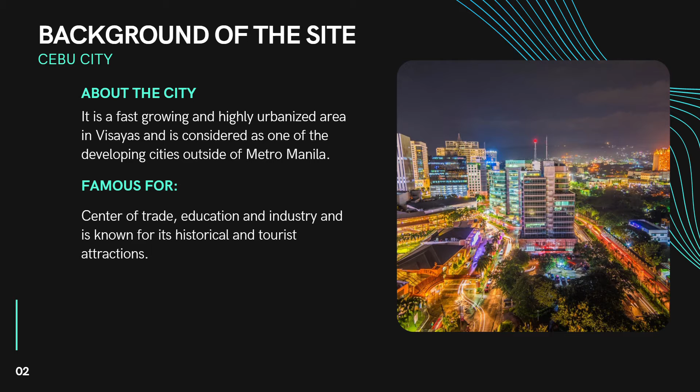A little background of the site, and why we chose Cebu City. It's actually a fast-growing and highly urbanized area in Visayas and is considered one of the developing cities outside of Metro Manila. The city is famous for its center of trade, education, and industry, and is known for its historical and tourist attractions.

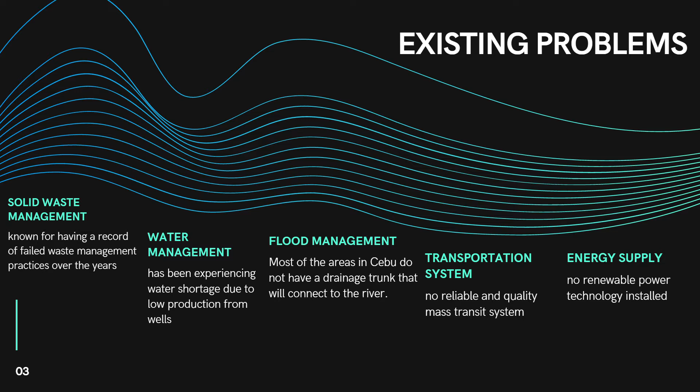With the developing city comes existing problems. We have researched that Cebu City's existing problems are solid waste management, water management, flood management, transportation system, and energy supply. With these five existing problems, we chose to tackle three: water management, energy supply, and flood management.

For water management, Cebu City has been experiencing water shortage due to low production from their wells, river and dam. These are some of the causes, including weak implementation of environmental policies and regulations as well as low public awareness and concern. For their energy supply, Cebu City imports almost all of its energy, other than the 11% of electricity consumed that is generated within city boundaries.

All energy sources like electricity, oil products, and natural gases are imported. Although Cebu City has significant potential to harness solar power, it does not do so because no renewable power technology is yet installed in the city.

For flood management, Cebu City is not really prone to earthquake, it's not on the fault line. However, the city has been experiencing hazards such as flooding in the uptown areas, mainly due to problems of waste and drainage. Floods within Cebu City are generally concentrated along the downtown areas.

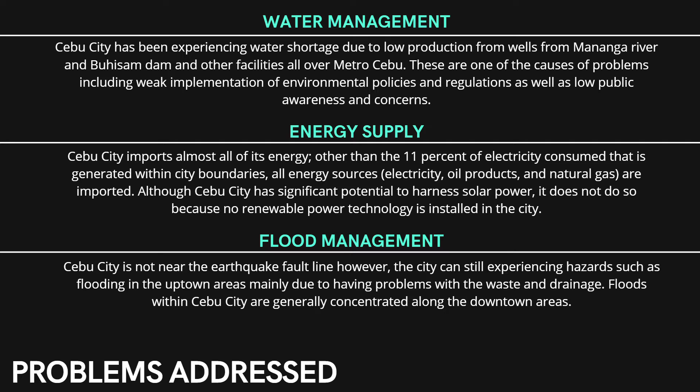A city of tomorrow, a self-sustaining city. The NDRRC pod is a long-term solution to the problem of water rising and energy supply in Cebu City. Power will be provided through a series of renewable energy sources, including solar, thermal, wind energy, hydraulic, and tidal power station.

The concept of the floating pod is that it harnesses tidal and wind power and has water desalination. It connects to the city, so it's able to provide electricity and water.

Through computation and research, the floating pod is able to make 800,000 liters per day, that's 211,337 gallons of water, and is able to provide for 20,000 people. For electricity, it's able to make 40,000 kilowatts and is able to provide for 40,000 households.

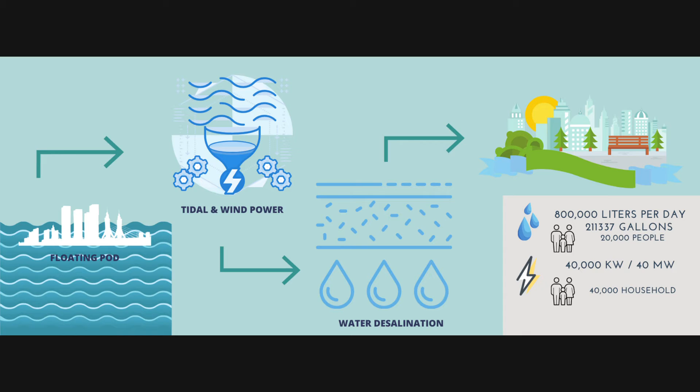For platform elements, this is from another case study we were able to research on. The platform size is 80 by 100, and platforms will be bolstered by biorock, a material created by exposing underwater minerals to an electric current.

The platform has three layers. The outer layer will be made out of polyester fiber covered by titanium dioxide, which can react with ultraviolet rays and can absorb atmospheric pollution through photocatalytic effect, in the same way as air purifying concrete and paving stones.

So there are three layers for it: the platform roof, the reinforcement walls in the middle, and then a floor and perimeter walls.

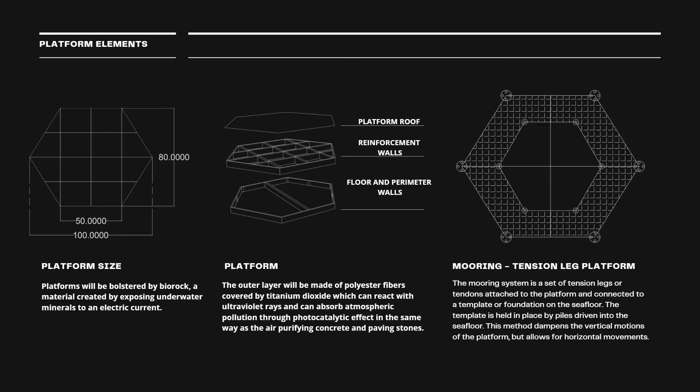For platform shape, we chose a hexagon because we have researched that an aerodynamic platform shape reduces impact of strong winds and flying debris. The symmetrical shape also gives balance to the structure.

For exterior circulation, structures would have double facade and would act as a buffer from wind and rain, and protect the interior where people will reside in case of flooding.

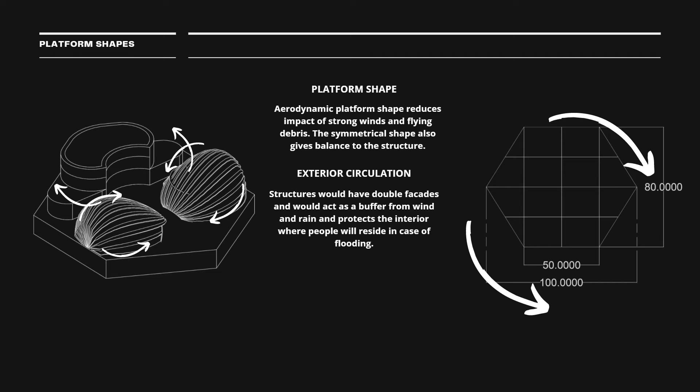This is the Cebu City plan. As you can see, the floating pods are relocated on water, and then there would be a huge land before the start of Cebu City on the far left. On the land, that's where we'll be putting up the connections, and then the connections will be connected to the city itself.

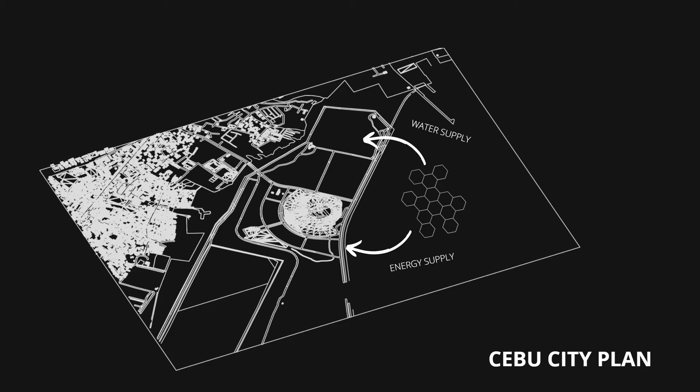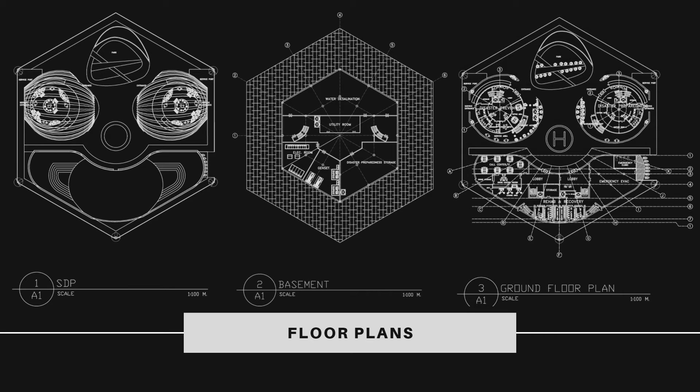For more detailed explanation, here we go. The basement is where we put the water desalination, utility room, disaster preparedness storage, and then the utilities like electrical room and genset.

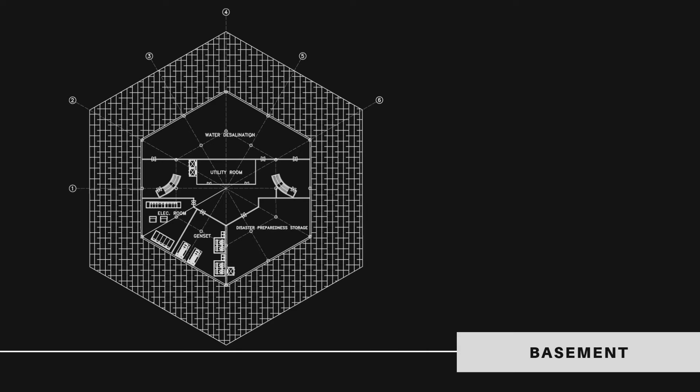So the disaster preparedness storage actually has its own elevator, and it connects to the evacuation centers, though it doesn't show here. This allows easy access from storage to the evacuation center in case there are people residing there and in need.

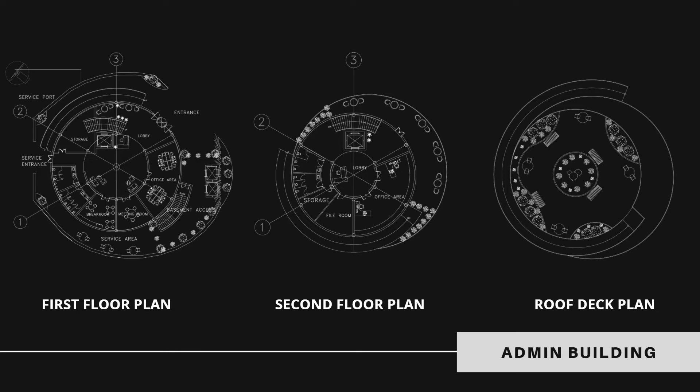On the second building, these are the rentable spaces and training center. As you can see, from the entrance you go inside, there's a lobby, two lecture rooms, and a big storage. There's also a service entrance, and they have a basement fire exit, so they have access to the basement.

On the second floor plan of it, there's a big training room and also a big storage. On the roof deck, there is also a garden.

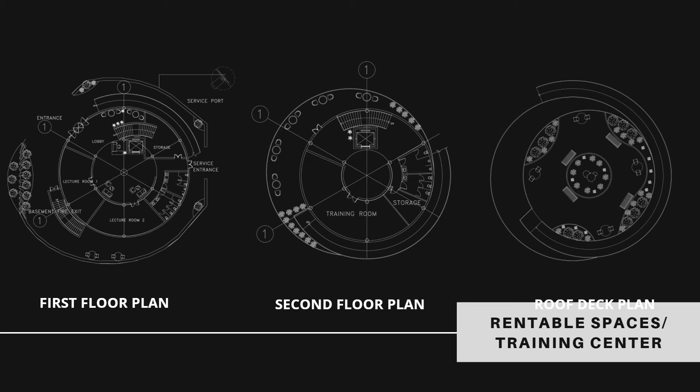For the control and evacuation center, the first floor plan on the right is the rehab and recovery. As you enter the lobby, this is where people will be signed in in case of evacuation and disaster. The lobby is big enough so people are able to register before they are put into the evacuation.

On the first floor plan, the emergency evacuation has its own speedboats on the right, and in case there are people who are really in need, they're put there. We have put an emergency clinic there, so once they arrive at the pod via speedboat, they're automatically put into the emergency clinic and be treated.

On the left side of the lobby, this is where the call center IT is, where people would call in case they're in need. We put a big office space for that, for different parts. We also have a drone storage and drone control center just to see how the situation of the people is going, and we put a lounge area there too. We also put a big CR on the bottom part for men's and women's, and a shower room in the middle in case of emergency.

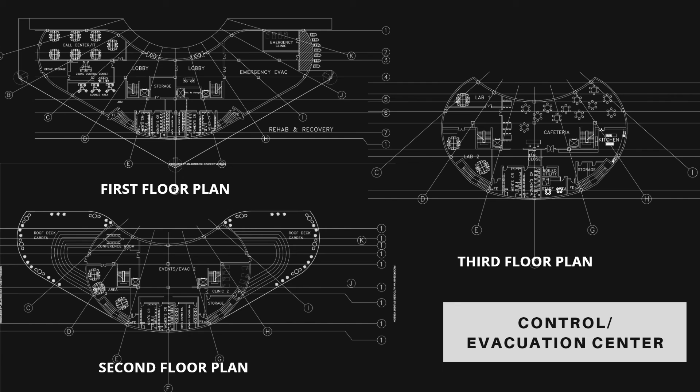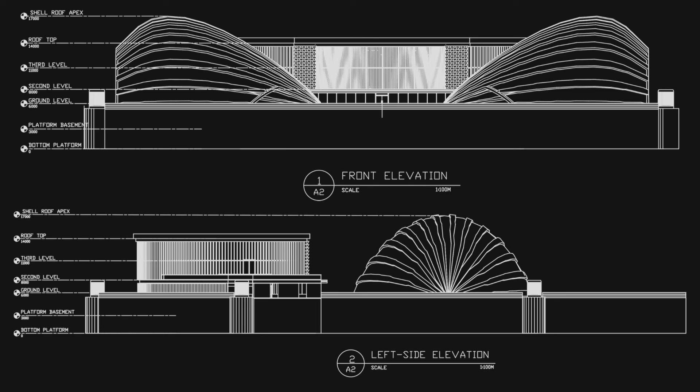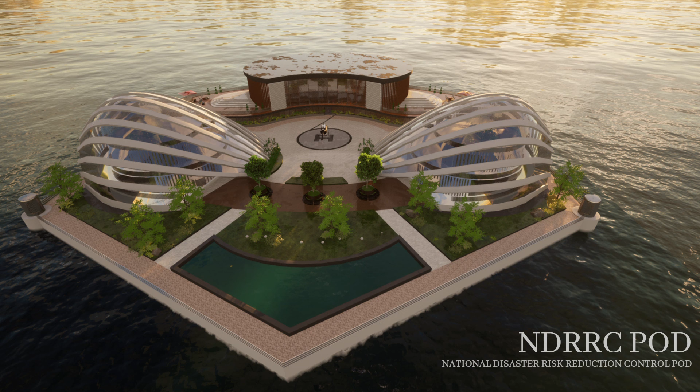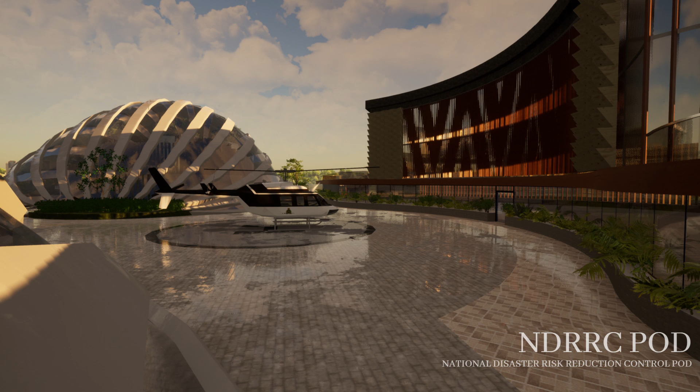This is the rendered perspective of the NDRRC pod. As you can see, it's on water, and we've put a helipad in the middle for emergencies, along with the protective layer and a huge park in the middle. This is the elevation and the perspective from the evacuation center.

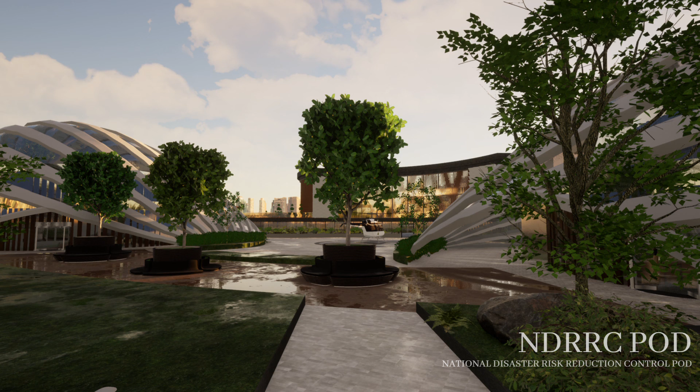This is the speedboat area, in case there are people in need.